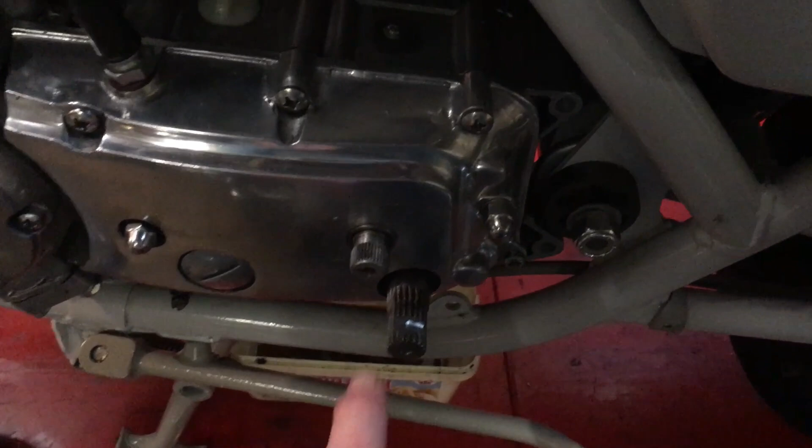Right, let's get on with that. Okay, that's the kickstart, gear change levers, and rear engine plate complete with footrest off. So that gives us complete access now to the outer gearbox case on this left hand side.

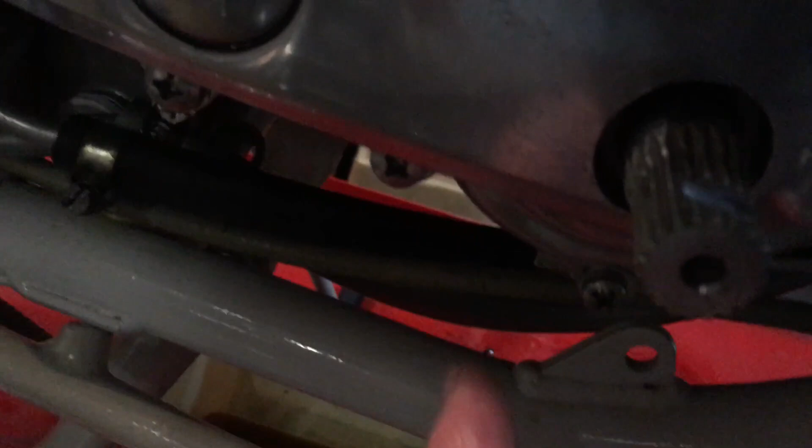So we've got 2 acorn nuts, and the rest then are Phillips, including these under here, all the way around the kickstart spline inside. So we'll whip those off, take the cover off. Oil's already been drained out of it, and we should be in then, and we'll have a look and try to determine whereabouts the gearbox cam is in relation to the quadrant, and try to work out what I've done wrong.

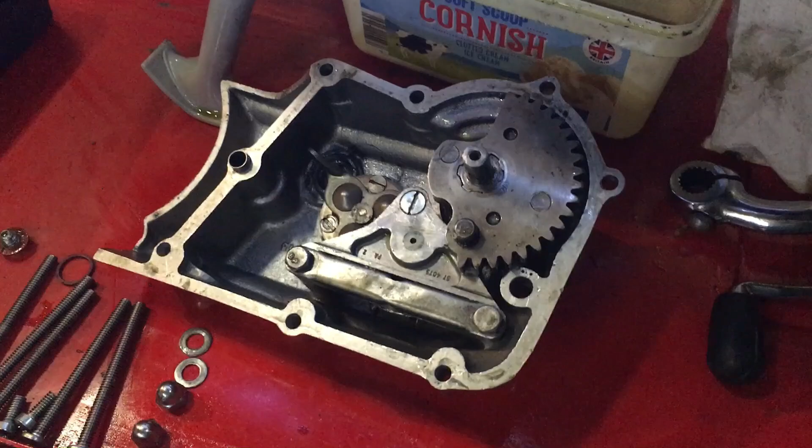Right, well, not too bad a job really, 20 minutes later for the whole job to get the cover off, and we're in.

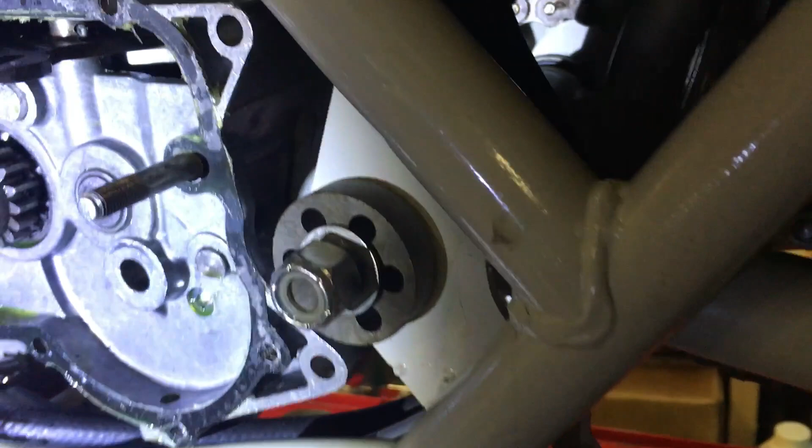So here's the gear change quadrant, which pivots on this spindle and engages at the back with teeth onto - you can't see it too well, let me just get something to point. There we go, just there, at the end of the screwdriver, is the cam disc, which is circular and in a horizontal position, and its spindle is this underneath here.

So if we take this rubber off, there's its spindle in there. So its spindle is vertical and the cam wheel itself is horizontal.

So what we've got to do is, we can take out the quadrant by removing that split pin, and we can remove its spindle, pull this out, and make sure first of all that the bike is in first gear before we then try to index it with the quadrant in the right position. I mean, you normally do it in first gear or neutral, but we'll do it in first.

And also what I want to check is that the plungers in the outer case, which are down here - you can't see them very well there with the torch. You can just see the two plungers, there they are, that's a better view of them, which are operated by the gear change spindle. Those two pointed plungers there engage properly with the slots in the quadrant there. I've got a feeling that might be an issue as well.

Now the other thing we can do is try and grab the quadrant and change gear manually with a bit more force, and that might prove, if that works, whether or not our gear change mechanism with the plungers there is slightly out of line, and therefore they're not able to grip that quadrant properly. So let's do a bit of testing now.

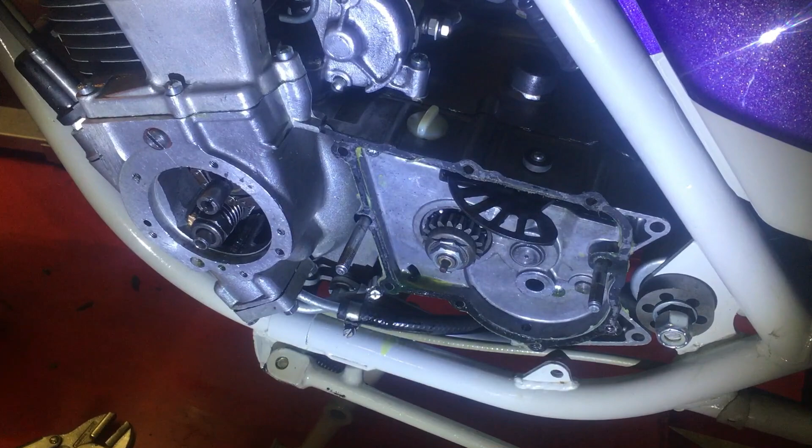Right, I think the plot thickens. Sorry about the light there. So you can see I've...

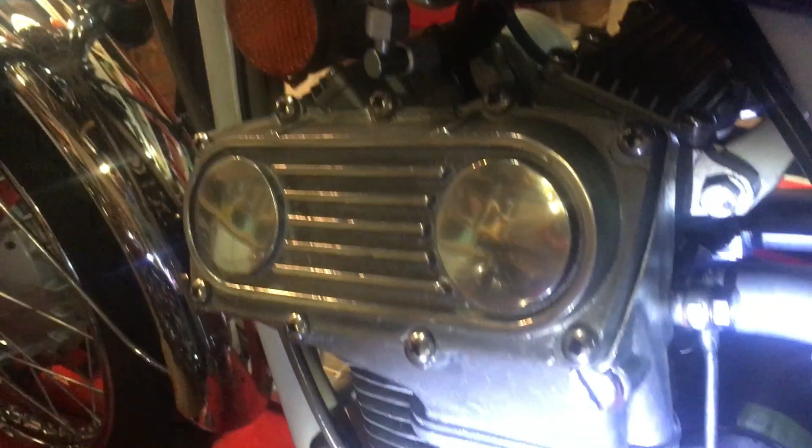Taken the timing cover off as well, because I thought I'd check in there while we're on this side. It's only a matter of removing 5 screws, and that's because we need that off anyway if we're going to have a look at the oil leak in the cam box, because we're going to take the chain off and we need the crank in the right position to do that. Anyway, we could check the seals and stuff on the timing cover, and that's fine, it all looks good in there.

But gearbox - you're using either a screwdriver or a clamp on the quadrant here. I can select first, neutral and second. It looks to be in the right position, but I can't get it into third. It's absolutely solid trying to get it into third.

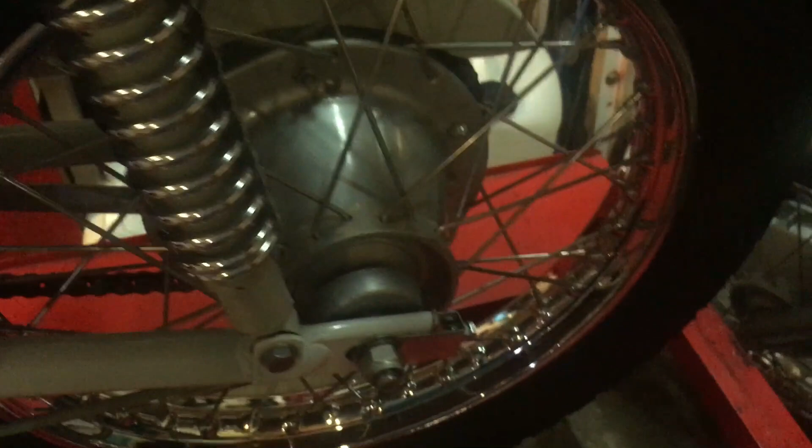I've now got the Fury on its main stand, which always sits on its back wheel, so it's awkward when you want to try and spin the back wheel, but I've got the front tied down with a strap through the wheel onto the bench. Using the cover off at the back here for wheel changing is pretty useful, because that means I can spin the back wheel to move the gearbox a bit.

So we could try and agitate it while we're changing gear, but it works for first, second and neutral, and the quadrant does look to be in the right position, but I can't get it into third.

So I think I'm going to need to remove the inner cover. Now there's only a couple of screws - where are we? One up there and one there. But I know that there's a bearing there, a ball bearing, you can see behind the Kickstart pinion, which is held on by a shoulder, and it's very tight on that main shaft there.

So we're going to need to remove the Kickstart pinion, which is easy enough, and then we're going to gently need to try and press this case by moving this bearing, which is on the shoulder on the other side of the case. So the bearing's got to come with the case on that shaft, and I know that's tight as hell. But anyway, we've got to do it, so let's get on with it and have a look inside there.

There's something not right. It could be the selector is misaligned, and the selector might have accidentally, somehow, popped out of the selector cam. But anyway, let's get that cover off and do it properly and have a look at it.

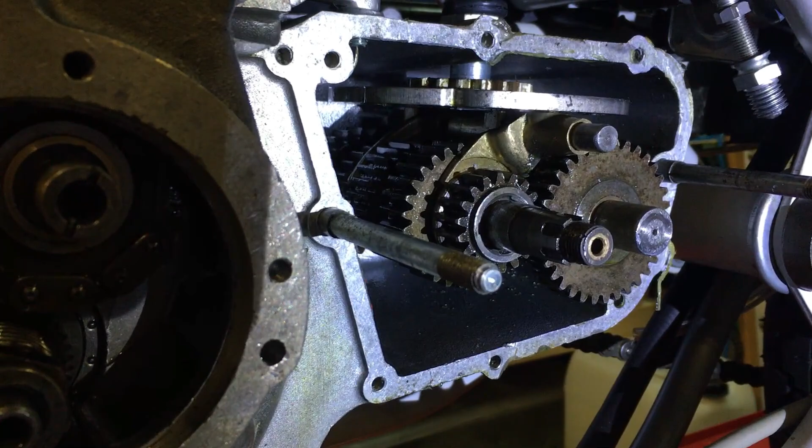Right, we're in. Got the inner cover off, no problem at all really, that was pretty good. So I've done the first inspection of this, and it all looks okay actually, which obviously is good news.

There are 3 selector forks like this brass one here that have nibs on the top side that slot into the cam here. Effectively, this box has been turned 90 degrees anti-clockwise from what you'd normally see on a Triumph Twin. So the cam plate sits on the top and its spindle comes through the top of the crankcase and is here.

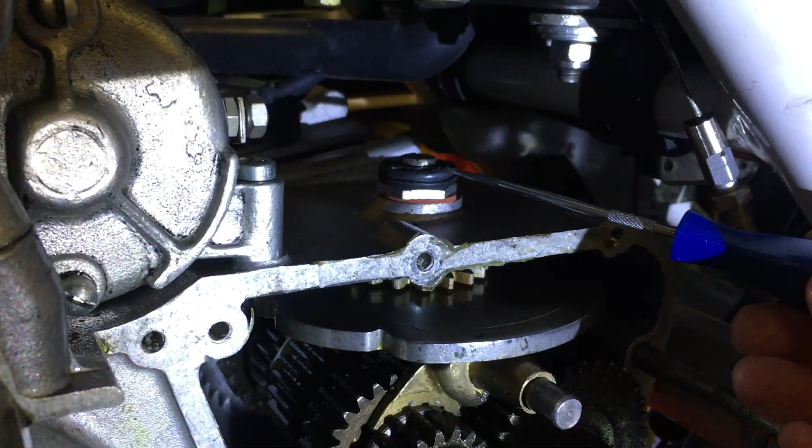So anyway, all the gears look good. All 3 selector forks' nibs are slotted in the cam plate, but trying to change gear manually by using either the selector quadrant or even trying to grab the cam plate - I do have spares of these - trying to grab the cam plate, then again it's fine for first, neutral and second, just will not go into third.

So before we take this apart any further, let's use some of my spares, because I can probably mock up almost a complete pair of clusters on the main shaft and the lay shaft, and see if we can identify what might be going on. I do have a thought, and I'll show you in the next clip.

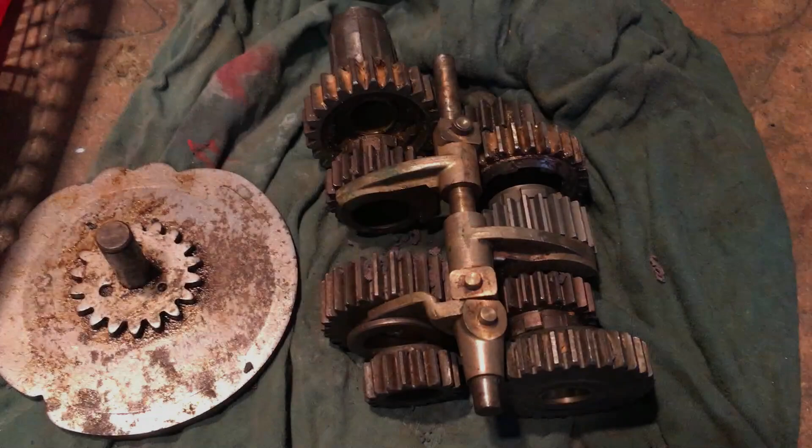Right, and here we are with them laid out. So first of all, here's the cam plate that sits on the top, and you can see the gears on the top of it that are driven by the selector quadrant. There's its spindle that pokes up through the top of the crankcase, and underneath you can see there are 3 slots for the 3 selector fork nibs to slot into.

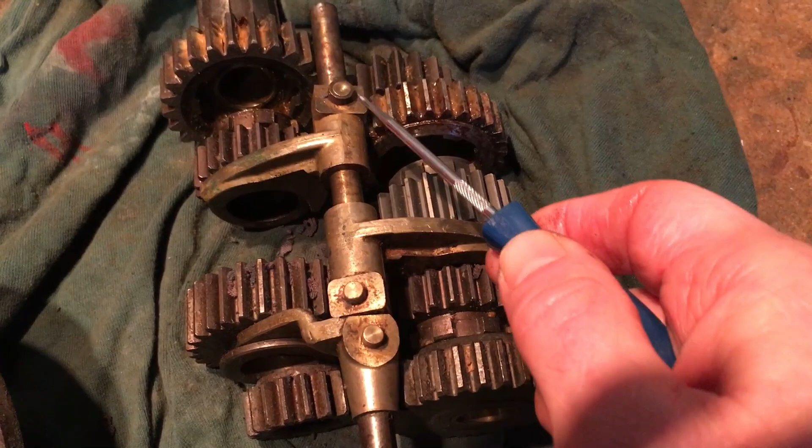One thing I also checked before I put the gearbox together is the little nibs on the top of the selectors for the slots on the cam plate. All of these should have, as you can see, a little hardened bushing that sits on there, which these two haven't got. But I know the 3 selectors actually in the gearbox at the moment do have those, because that was one of the things I had to check, and I do have spares of those little bearings, bushes, whatever you want to call them.

So that's okay. Right, so where we've got it - I do have a spare lay shaft, but I don't have a spare main shaft, so I've just laid these gears out without the shafts. This is the lay shaft here, this is the main shaft.

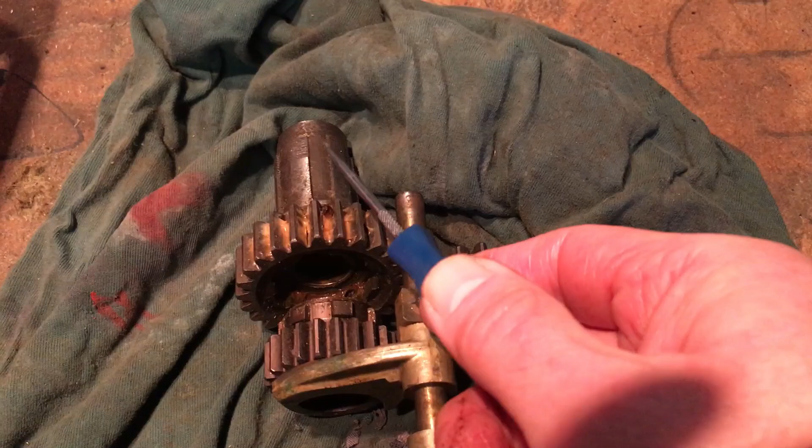This goes out to the gearbox sprocket, which mounts on here. The lay shaft goes all the way through to the clutch, and on this side the main shaft comes out for the Kickstart pinion, ratchet pinion.

Now I've got all the gears except for main shaft third - I don't have another one of those. So I've just laid this out and started to simulate what might be going on in the box, and I think I might have come across the problem. It's to do with the lay shaft third gear meshing into, I think that's the 4th gear rather than the 2nd. But anyway, the dogs on the lay shaft third gear are not inserting properly into this gear.

And the reason why I'm thinking that is because, let me just take these out and I'll show you. There we are. So there are 6 dogs there, and these two are definitely the right gears, because most of the gears have a unique set of teeth and a profile. There's the other gear that the dogs should mesh into, but they don't, because you can see there are 7 slots in this and only 6 dogs on there.

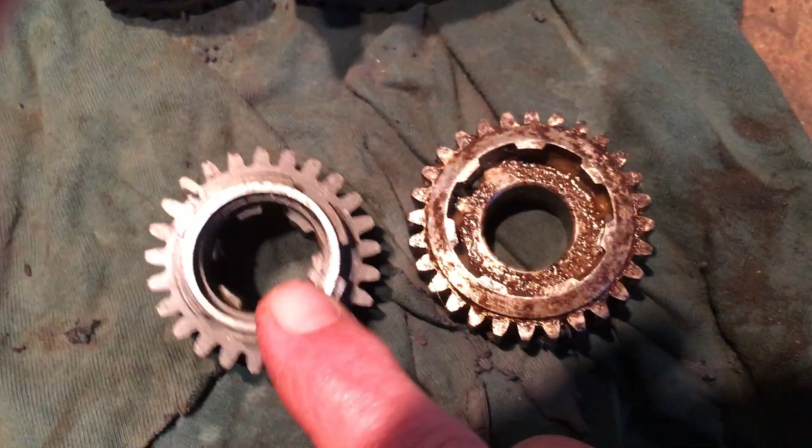And this has sounded some warning bells, because when I was building up Tony Page's Bandit, which uses the original Umberslade experimental motor stamped TX3, that motor was a developed motor without a gearbox, so we had to put together a gearbox from all the parts we'd managed to accumulate, or Tony had managed to accumulate. But we only had one third gear between us, so we got a couple made up, and this is one that we had made up.

And at the time we also had to probably make some slight modifications over and above what we thought was the correct gear, because we found there were two versions of this gear, hence the different number of dogs. And I'm just wondering whether I foolishly had this gear made up assuming all the spare gears I've got for fourth gear is the same as in his Bandit, but it's probably not.

So I'm just wondering whether the issue is that we can't get the box to select third gear because we've got the same problem in the box between the two gears, in that the dogs and the recesses won't mesh because they're not a match. So let's just check which gear this is - we go to the parts book. We're the opposite way around here. So there's our lay shaft third gear, and this is the gear that it won't mesh into.

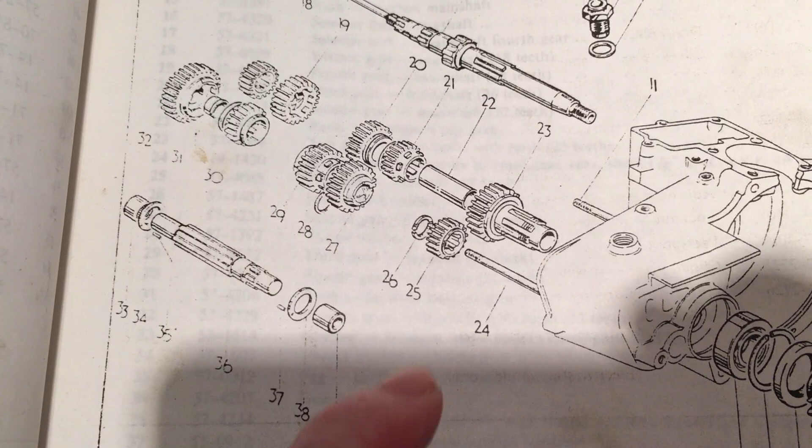There is a washer in between them as well. I must check that out. So, 27, second gear. Okay, I knew it was either second or fourth.

So that's lay shaft second gear. Now luckily I had these gears made up at a fairly local company in Leicester, M&B Precision Engineers, who make up custom gears either to patterns or to drawings, and I do have drawings for these. So it looks like we might be looking at a trip to them, but they're good guys anyway, so we can fix this, but it might take a bit more than we originally thought.

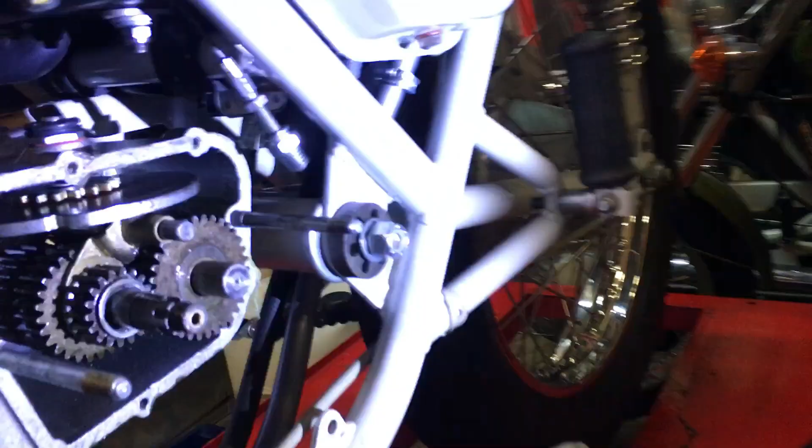So let me just show you again what I think we can do to check this out. Let me just stabilise the light so I can just show you. Right, stabilise the camera a bit.

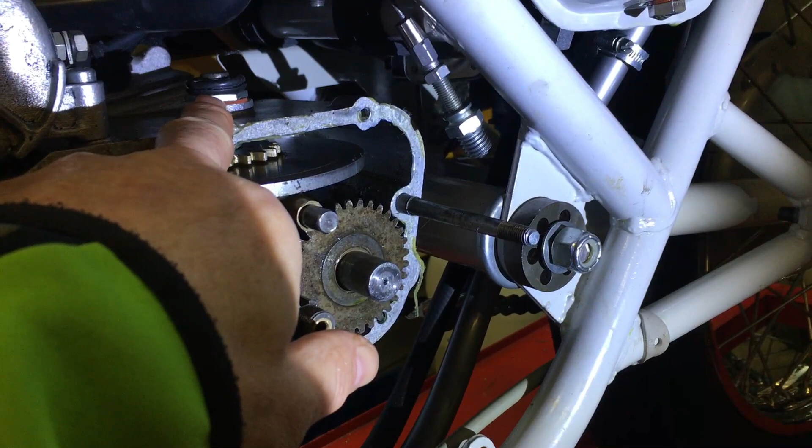Now, the lay shaft just slots in a needle roller bearing, obviously on the other side of the gearbox. But I'm just wondering whether I might be able to get that lay shaft out on its own, because what you can do with this is the cam plate is held in by a hollow nut here. But if you undo this nut, which rises up, you can raise the cam plate so that you can disengage the selector fork nibs from it.

And in that way we might start to generate enough movement in this lay shaft to maybe slightly take it apart and see if that is the issue. There's certain things we can do. So for instance, this gear here is just on a bushing, and that will just slide off, and all of a sudden you can start to try and take bits and pieces apart. It's a bit stiff, so I'll need to pull it, but we might be able to do it.

What I'm doing is probably trying to avoid having to take the main shaft out, because if we have to do that, we've got to go and take the primary drive to pieces, and to do that we've got to take all the exhaust etc. off. So I'm just going to try a shortcut first. If we can't do it, we can't do it. But there's no harm in having a go, as long as we don't damage any components and don't force things. If we have to try and force anything, then that's it, we'll strip the lot properly. So let's see how far we can get with dismantling the lay shaft.

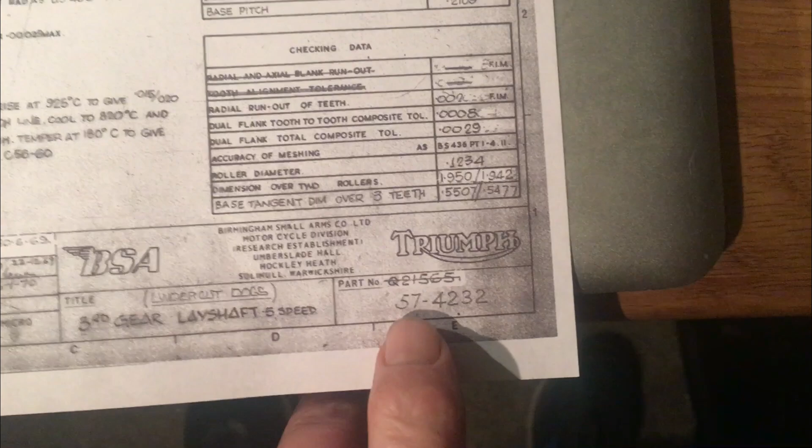So let's go back to the drawing for second and third gear lay shaft and check those out. Well, there it is. Obviously a photocopy of the original drawing, but complete nevertheless, of the lay shaft third gear, and the part number's correct, 574232, and it clearly shows that it should have 7 dogs. 1, 2, 3, 4... yeah, 7 dogs, not 6.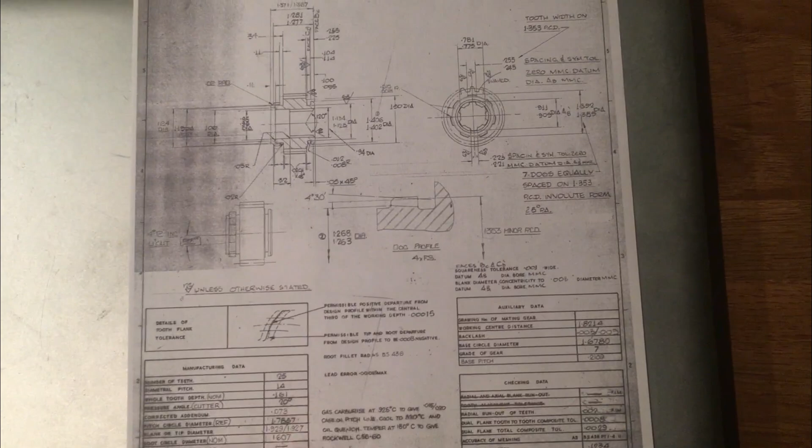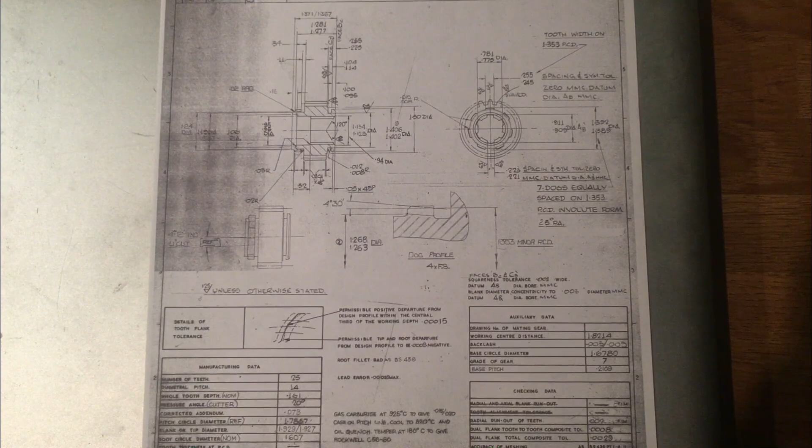So what we'll do then is get in touch with the relatively local precision engineers tomorrow and liaise with them and share this drawing with them. We'll probably have to reprint this and change the brightness and contrast a little bit, but it's pretty clear, quite complex really, but not impossible, not at all. And as I say, they've made gears from patterns before, but I'm sure they'll be more than capable of doing it from drawings, setting up code and CNC and stuff like that.

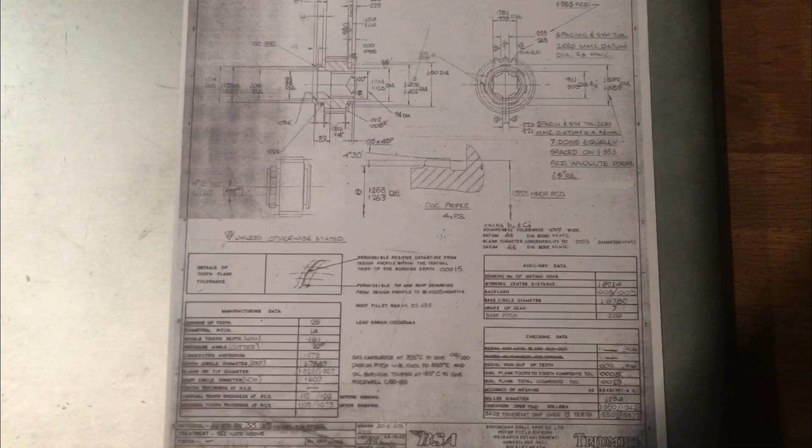So this little saga and reparation is going to run for a little while, so we'll probably leave it there as the first part, and then I'll provide an update once we get an idea of when we'll receive a manufactured gear, but that might take a little while depending on how much work they've got. So I say we'll leave it there.

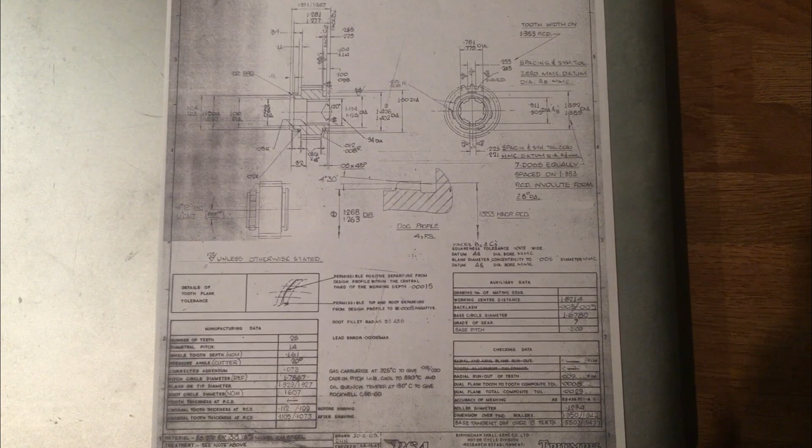And no doubt I'll see you all again soon on another instalment of the Fury, where we might focus on the other area that we've got to look into, which is the oil leak from the cam chain tunnel. Or alternatively, we could just finish off the final oil pressure test on the A70, or indeed start on the top end of the A75V. So always plenty to do.